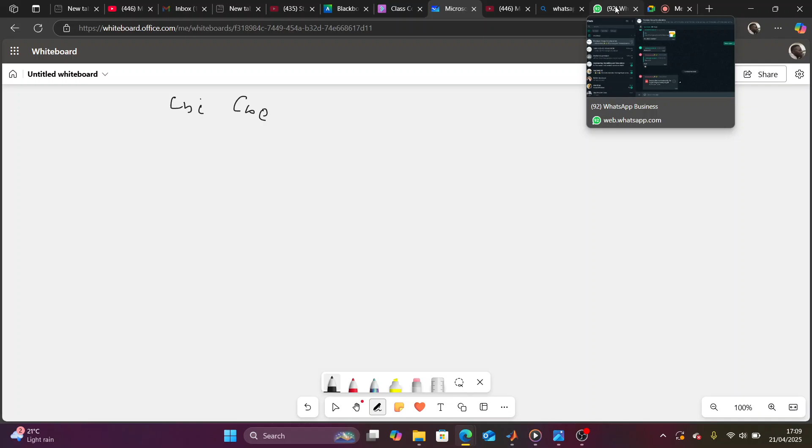So, oh, Daphne, Masimeme, Bukalo. Hello, Bukalo. Hi. I didn't see you today. What happened? I was cold, not feeling good. Oh. Yeah. Tomorrow is gonna be cold then. Hi.

Even though I cry, it doesn't mean that I'm weakening. Where is it? This is chapter 5, ne? Chapter 6. Why is this thing not rolling? My heart is beating. I just wanna love you, I do. Hey, I love singing, you see. That's all I do when I sit alone. I sing. I just sing for a living.

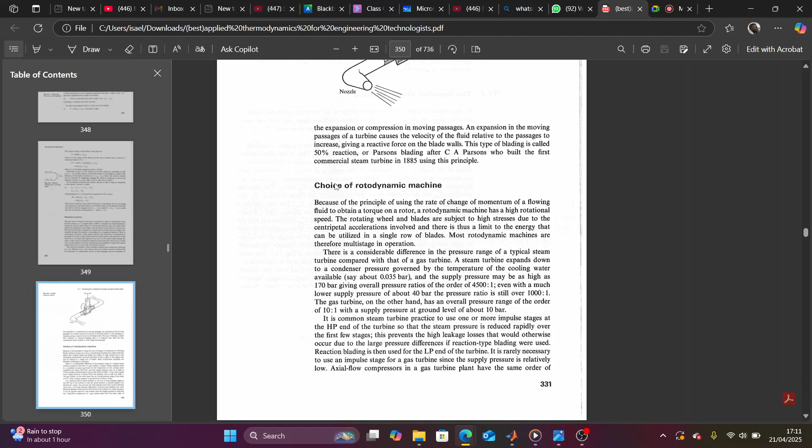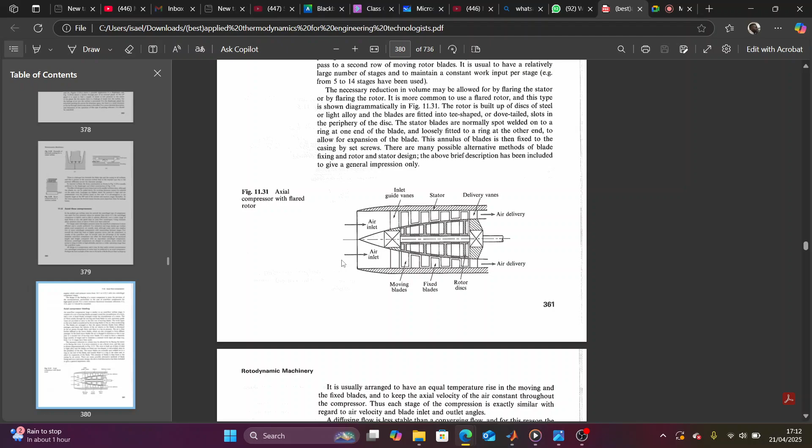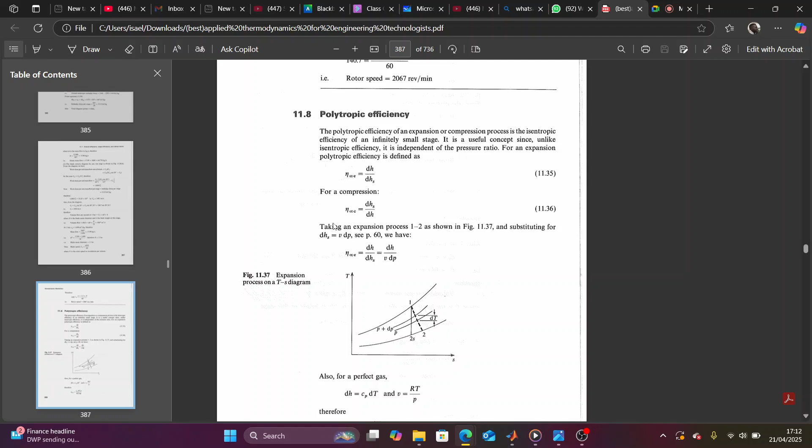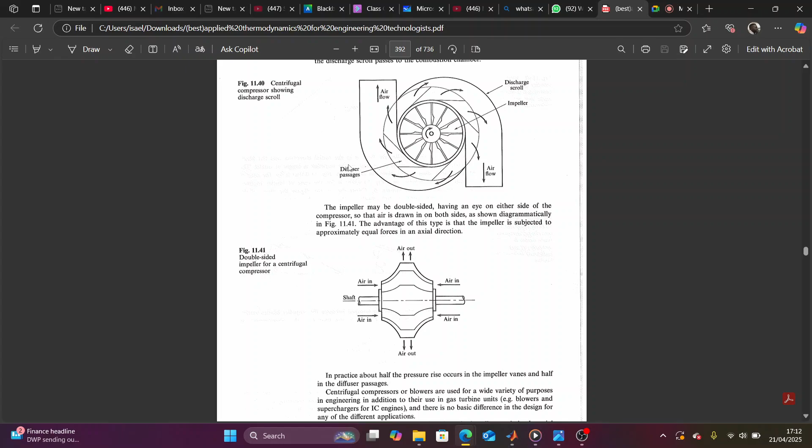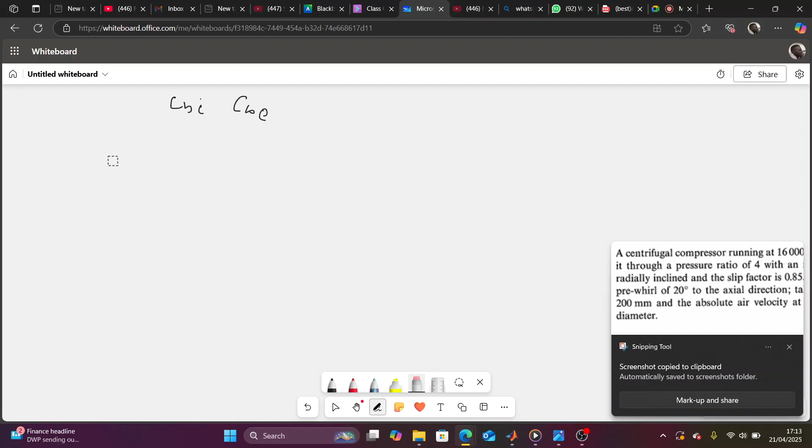I don't wanna say much. Key 11.20. Let me print it. I just wanna love you, I do. I just wanna kiss you, I do. Hello, Bukalo.

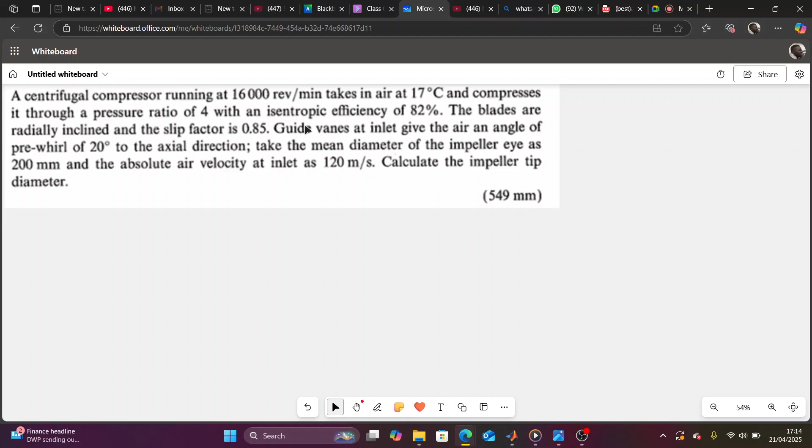Guys, I'm gonna miss you because you guys gonna be the last generation that higher education has taught. Last, imagine. You're not teaching next semester? I am. You guys gonna be the last generation because this is my last one, my last year, my everything.

I'm giving my all. Okay, guys, they said a centrifugal compressor running at speed takes air at 17 degrees and compresses it through the pressure ratio. This is the pressure ratio, RP, of efficiency 82. They say the blades are inclined and the slip factor is 0.85. Guide vanes at inlet give an air angle pre-whirl of 20. Okay, this one is pre-whirl. That's why we talk about W. When you hear about pre-whirl, that's why you talk about WR.

You will see, to the axial direction, take the mean diameter of the impeller eye to be this. Calculate the tip diameter at inlet. Okay, remember guys, you have two diameters here. You have the mean diameter of the impeller eye. This diameter is the one that we use to solve the speed that the compressor enters. The impeller tip diameter is also something.

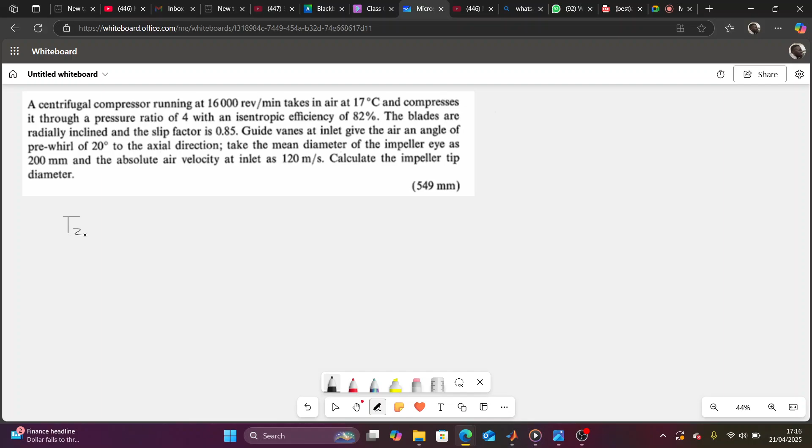T2S minus T1, where T1 is the temperature at the entrance, which is this one, 17, to be equal to T2 minus T1. That is what gives you the efficiency η, this one.

You also have this relation here that says T2S over T1 is equal to, normally we write P2 over P1. But P2 over P1 is what makes the pressure ratio RP. So that's one of the reasons we write it like this. We write it as RP, everything to the power gamma minus 1 over gamma. Remember, gamma is a property of air, which is 1.4.

So when you have this information, do you know why we are given this information, guys? The only reason you are given this information is to solve for the power. You have two ways of solving the power. The first way, according to the centrifugal compressor, you have this formula. Let me show you. Where's the book again? Here is the formula of the power input.

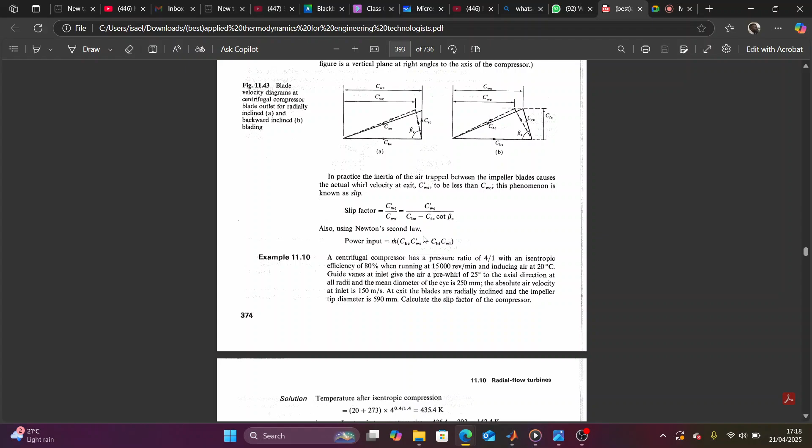Do you guys see it? Okay, you have the formula of the power input. Let me write it. What is the formula of the power? Let me copy from my textbook. Power, they say, is flow rate. If there's no flow rate, you don't write it. But there's flow rate. The only reason there's flow rate, if you remember in class, I said everything that is flowing. Remember, on this centrifugal machine here, there is a fluid flowing. That's the reason why you see its presence.

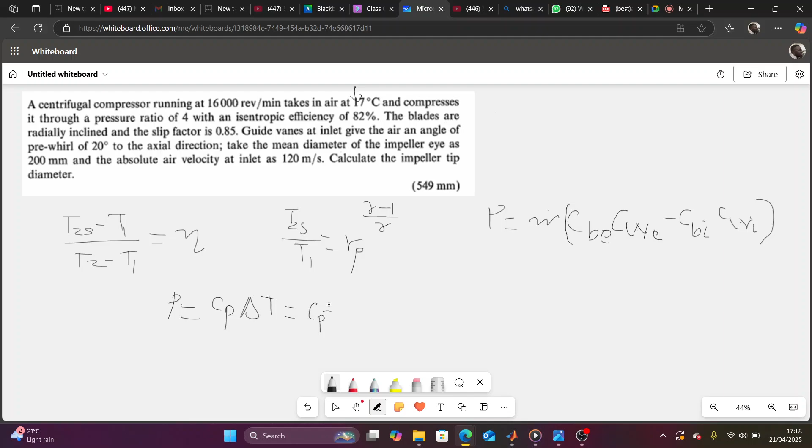Okay, my good guys, this is the power. You can also get power with these temperatures. What is power? Power is Cp multiplied by change of temperature. But in this case, what is the change of temperature? It is T2 minus T1.

So, this type of question, I want you guys to see it like this. Sometimes they can ask you to solve for the slip factor. This information of temperatures given to you, this temperature here, and the efficiency here, is given to us to solve for the power. So you already have extra information. You see it now. That's the reason when you solve this power here, you can equate it here.

Okay, let's start solving the problem. Let's solve the power. We don't have this one, we don't have this one, we don't have this one, but we can get the power here. Do we agree, guys? Okay. Why are you saying great? Okay.

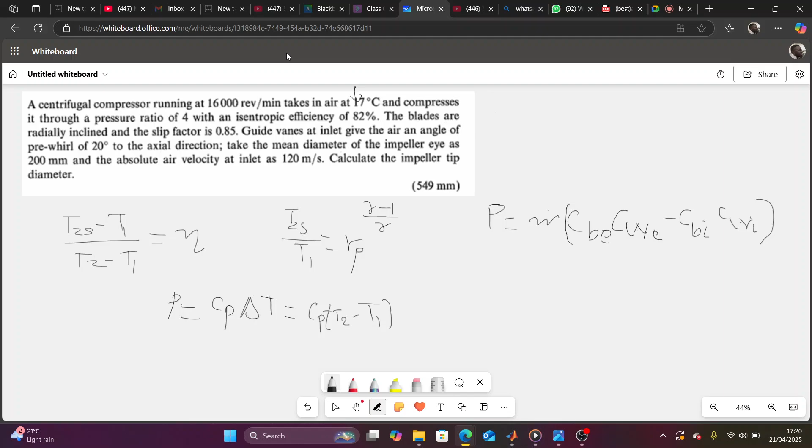What do we need to do quickly here if we have to solve for the power? We need T2 minus T1, right? We have T1, the temperature of air here, 17. We have the efficiency. Now, what can we do here, guys? We can do a quick math. Do you agree that if I can get T2S, I can solve for T2 minus T1?

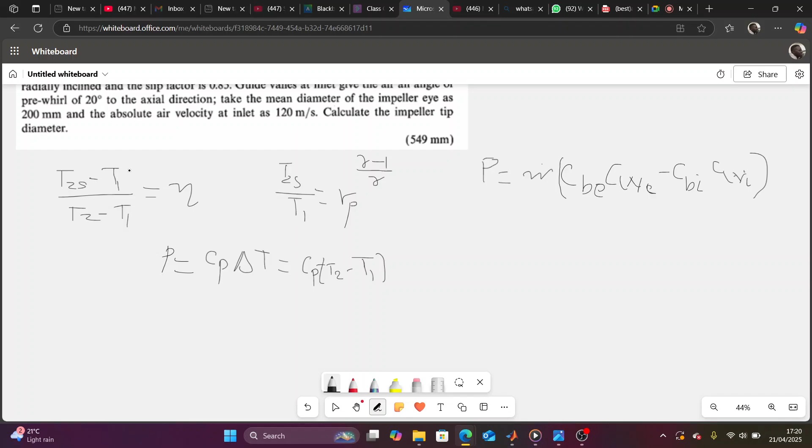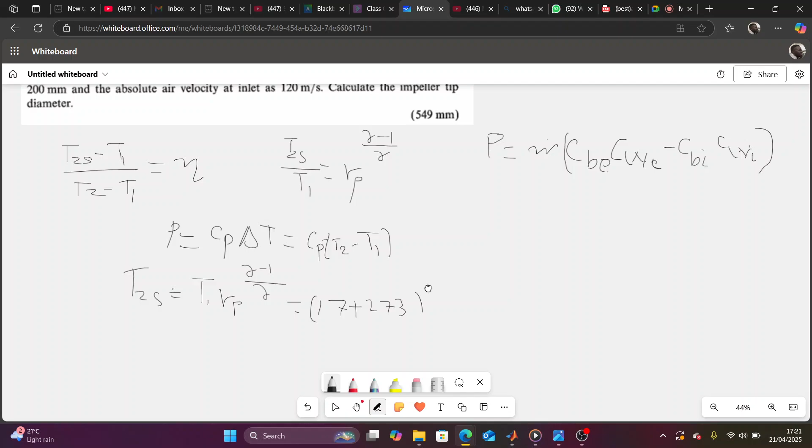Let's start here. If we have to get T2S, what is T2S? T2S is T1 multiplied by RP to the power gamma minus 1 over gamma. Can we do the calculation? T1 is 17, and it has to be in Kelvin. Are we all good? Multiplied by RP, the pressure ratio, which is given here as 4. On top is gamma minus 1: 1.4 minus 1 over 1.4. If you do this calculation, you get T2S.

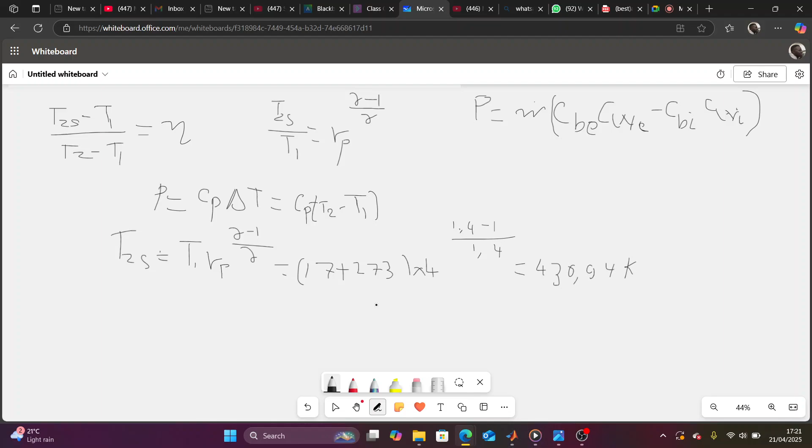What is the answer? Hey, you joined earlier. Are you with me? It's 430.94 Kelvin. Okay, do you guys agree that if I have T2S, I can now solve for this one here? I can use this formula and make T2 minus T1 the subject of the formula. I don't have to solve for T2, I don't know if you notice.

Do you see? I don't have to solve for T2. I can simply make T2 minus T1 subject of the formula. What's going to happen? I'll have T2S minus T1 over what? Over eta. So therefore, you have T2 minus T1 to be equal to what? What is T2S? It's what we just solved.

430.94 minus what is T1? 70 plus 273 is how much? 70 plus 273 to get this in Kelvin. It is 290, eh? It's 343. Is it 343? 17 plus 273. Oh, you're saying 7. I thought you were saying 70. No, forgive my English.

What is eta? Eta is 82%. So if you convert it, you have 0.82.

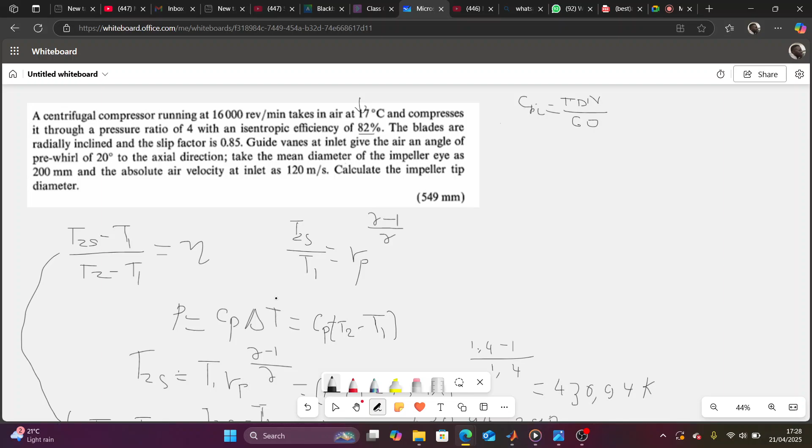What are we given? We are given the speed in rev per minute of the centrifugal compressor, which will give us CBI, pi d n over 60. We are given efficiency. The efficiency is used to solve the power. Remember, the pressure ratio and efficiency they gave you are simply for you to get the power using temperatures.

So I don't know if I should also write it. Just write it. We are given the efficiency. Let me write the formula that will be used. It will be used to find T2S minus T1 over T2 minus T1, everything equal to efficiency. Are we good on this one?

You also have another piece of information that we'll be using here. This pressure ratio of 4, is it like T1 over T2? No. Normally the formula is written like this: T2S over T1 equal to P2 over P1. This is the pressure ratio, which they already gave you. That's RP. Check chapter 10. So the 4 is P2 over P1? Yes, that 4 is called RP, pressure ratio.

Whenever you hear pressure ratio, like even on the example here, what was the pressure ratio? They said pressure ratio is 4 over 1, which is simply just 4.

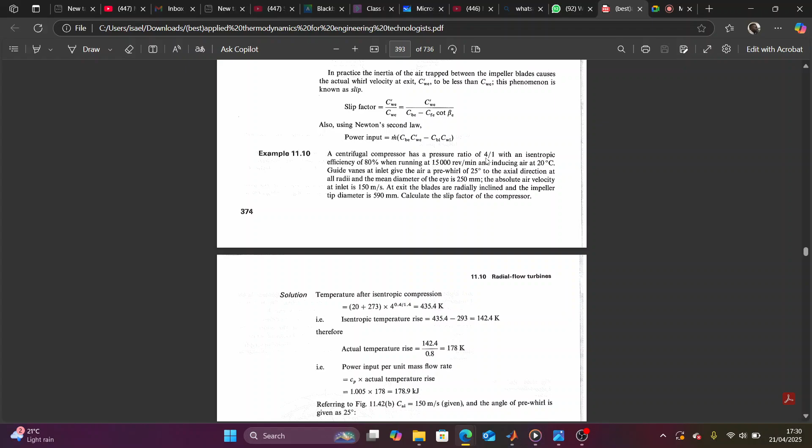So yeah, let me just recall it. RP gamma minus 1 over gamma. Now let's read again. They say the blades are radially inclined and the slip factor is, I don't know how you guys call slip factor, but in our case here, let me just call it S. They said guide vanes, they are saying guide vanes at inlet air angle.

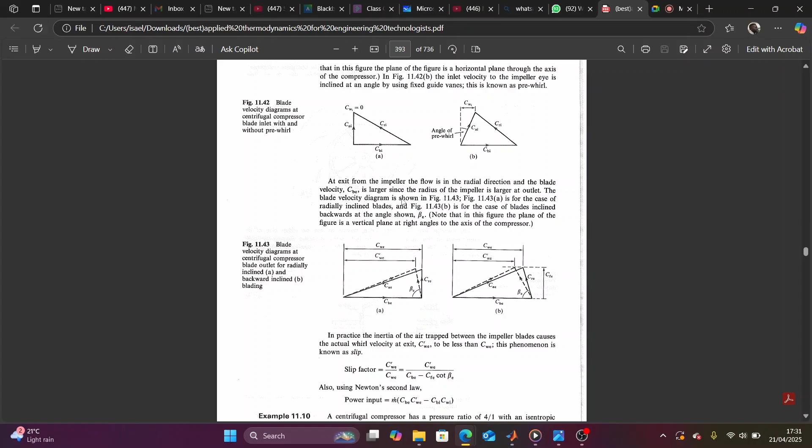Remember, if you look at the drawing here on the explanation, these things come at an angle. There is a triangle, so there is an angle there. Let's call this angle theta to be 20 degrees. Now they say take the mean diameter of the impeller eye. The impeller eye is simply the one at the entrance, and it is 200. So what is that diameter? It is the diameter here. That D is 200 millimeters.

Now what is happening? We have the absolute velocity at inlet. What is the absolute velocity at inlet, guys? It is simply CAI. It is this velocity. So whenever you hear inlet, it is CAI. What is CAI? CAI is 120 meters per second.

Now, what is the question? Calculate the diameter of the impeller tip. You have to make the difference. That diameter comes from the formula of CBE. CBE is also pi multiplied by d multiplied by N over 60. But in this case, what is our d? We do not have it, which is what we are looking for. So I'm gonna repeat myself. For CBI, the diameter that you use is the impeller eye. If you hear the impeller tip diameter, it is the diameter for CBE.

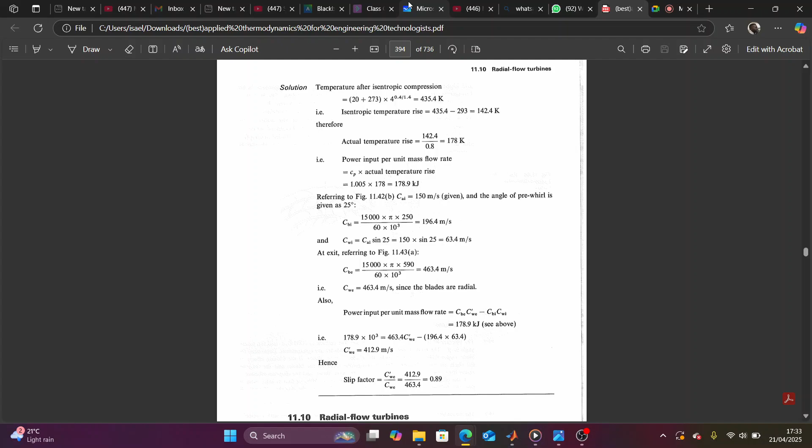Let me show you again in another example in the textbook. In this example they said the tip diameter. What is the tip diameter? It goes with CBE. That's why you see they use that 590 here. So you can recall it like that. Any question, guys? Okay, we move.

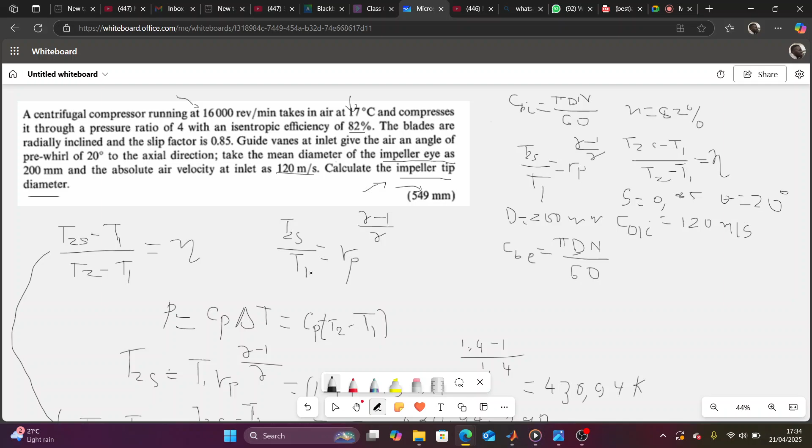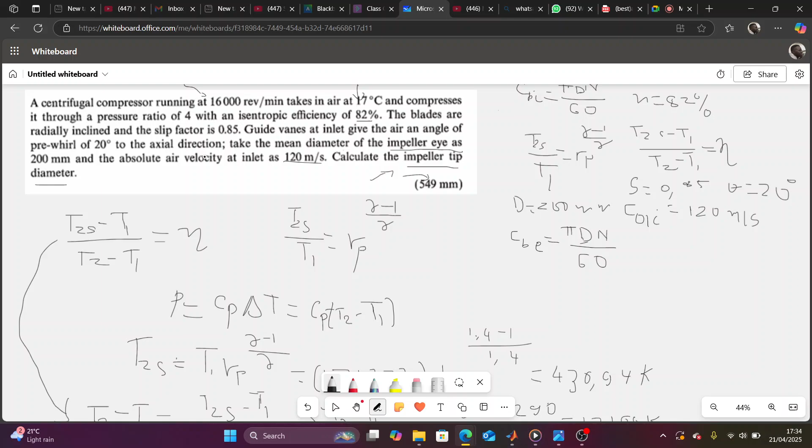Whenever you are solving this problem on the compressor, no matter if you don't know what is being asked, the first thing to do is solve for the power. Remember, power is also equal to M multiplied by, from the textbook, CBE multiplied by CWE, minus CBI multiplied by CWI. We have already solved for the power. The next thing to do is simply to solve for all the elements inside here. You have the power which is here.

Now, you also have another formula from the textbook. It says slip factor is equal to C prime WE over CWE. Now we've got everything. Yes? Can you please just repeat from the power? This formula, I just copied it from the textbook. Do you see this one?

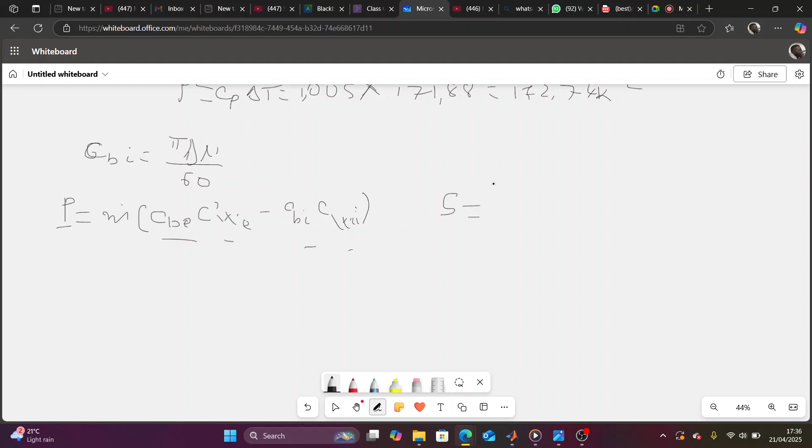You also know that S, the slip factor, is C prime WE over CWE. Okay, guys, can we proceed now? Let's start by getting CBI and CWI. This one we can get easily. For CBI, we've got everything, we just need to apply the formula. Let's get CBI. That's wrong handwriting. I need to buy a pen and a digital tablet for my online classes.

Pi is pi. What is D? D is the diameter given here, the impeller eye, 250. We're using it in meters. In meters it is 0.25. What is N here? 15,000. Over 60. If you do this, you're gonna get CBI. What is the answer?

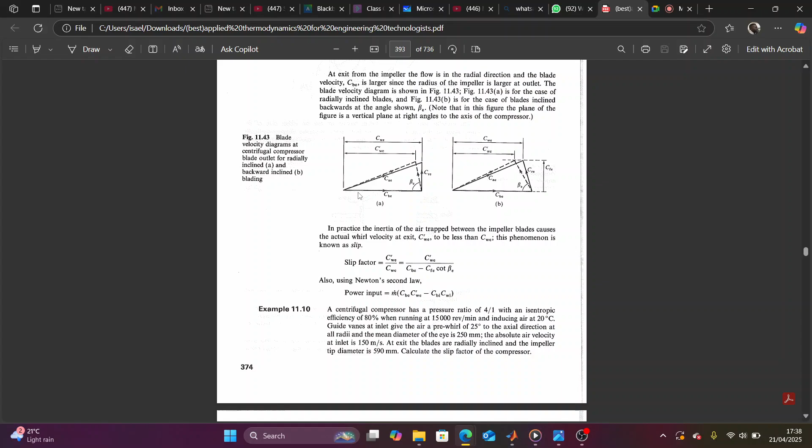How do they get it again? If you look on the example on the note, do you see what is CAI? It is just on the opposite side. Do you see CAI here? When you look at it as a right angle triangle, CW here. Here it is 0, but it changes depending on the angle of the pre-whirl.

If the pre-whirl is 20 or whatever, this thing keeps moving. So how do you get CAI? Remember, do you see where there is CWI? Look at the right angle triangle. It is on the opposite side. It was the simple reason that CWI is this sine theta, sine this angle here.

Let me do this so that we can all be on the same page. Angle of the pre-whirl.

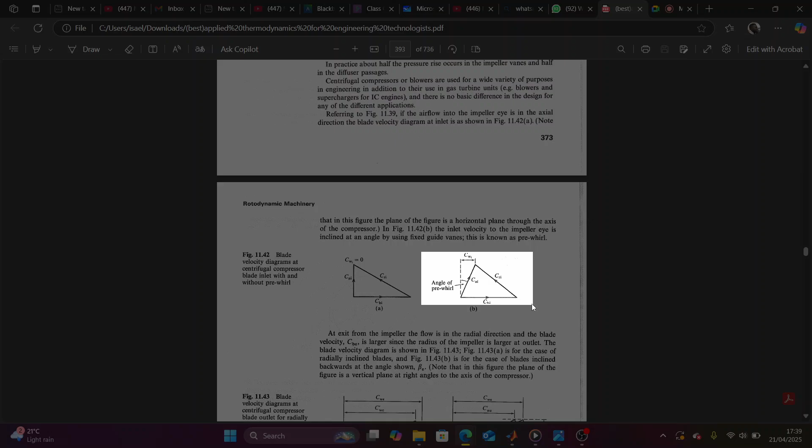Who's joining at this time? You always coming late. Even online you are late. Mr. Gordon, even online you are late, my brother.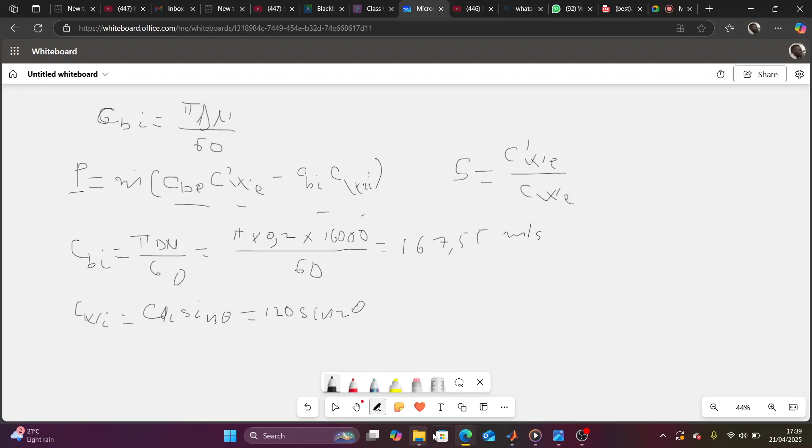Okay, do you see what I'm talking about? This thing is changing according to the angle of the pre-whirl. Do you guys agree? The angle of the pre-wheel in this our case, it is this angle, it is 20. Do you see what I'm doing, guys? So this is 20, but this one here, it creates a right angle triangle. So what is CW? CW here is on the opposite. That's why you see CWI is simply CAI sine of the angle of the pre-whirl, which is called theta.

All you have to do for CWI, you can simply remember this. As long as you hear that there's a pre-whirl angle, you know that CWI is this sine this. But this is how it is proven.

Are you with me, my guys? You see only one speaking, how about the other one? Are you with me? Yes. Can I delete this picture? Let me leave it there.

So if you calculate this, what is CWI? It is 41.04. Is it also raining there by you?

No. Yes. No. Okay, then we are not in December. We are not in December.

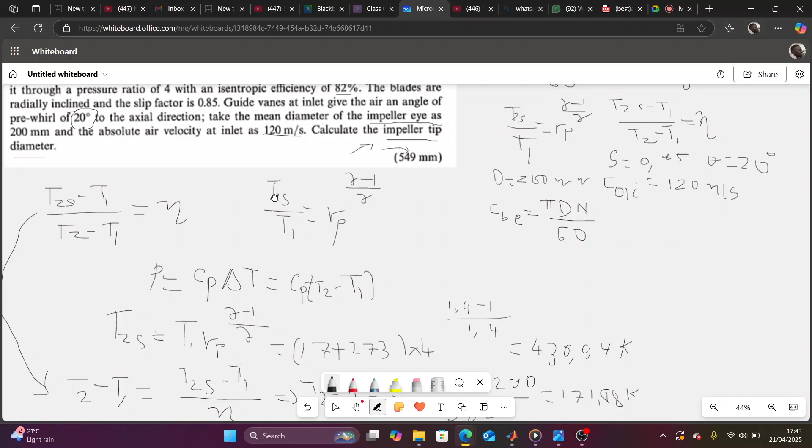Now how do we get this guy CWE now? Remember, because this thing is radially, let's read the problem. Is it radially inclined? They say the blades are radially inclined. The term radially here is simply being explained in the textbook, like if you do have radially blade or radially inclined, it simply means the value of your CWE will be the same as the one of your CBE.

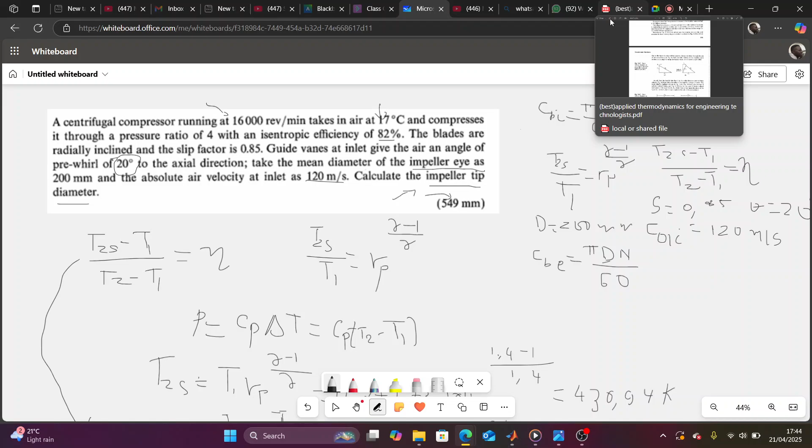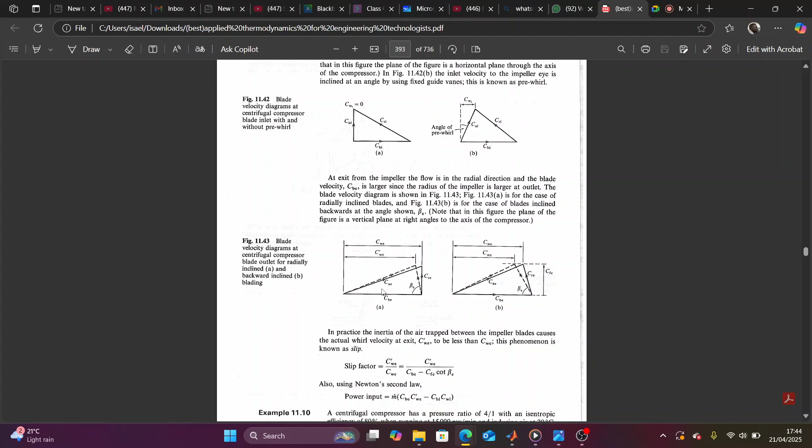When do you have a radially inclined? Let me show you an example. Do you look at this drawing A? Look at where my this thing is showing. On A, in this case, I don't know if I can zoom in. Do you see CWE? When it is radially inclined, you have CWE to be equal to CBE. That's what it means. The figure can change depending on what's happening here, but that is what it means.

So that's one of the reasons, even on the example here, they do consider CBE to be equal simply to CWE because our system is being radially inclined. So what does it mean in our case? What are we going to do here? The same value of this guy here will be the same also for this guy. Any question, guys?

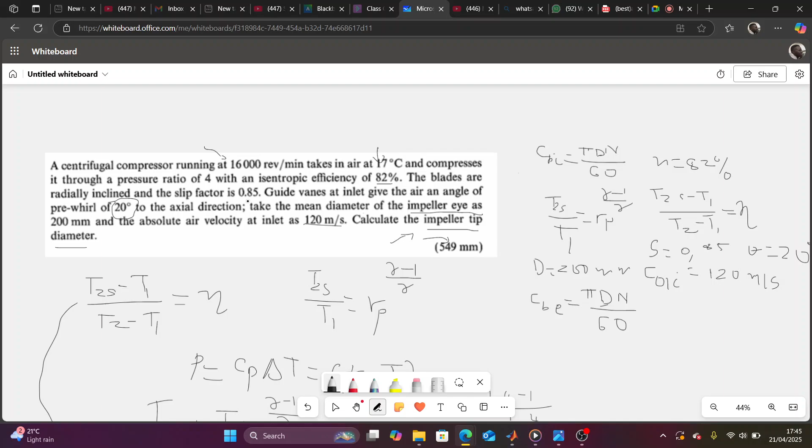Any question? I'm gonna repeat again. Mr. Eyes, can you please repeat the CW what? Which CW, my brother? The one you just wrote right now. Oh, I was saying, as long as you hear that in your question here, these things are being radially inclined, or there is a radial being involved here in this expression, it simply means your CWE, your CBE, let me write it here, your CBE will be equal to your CWE.

So because we already solved CBE on top here, the answer that we got will be equal to this one. Do you see it? Yeah. So if there was no radial incline...

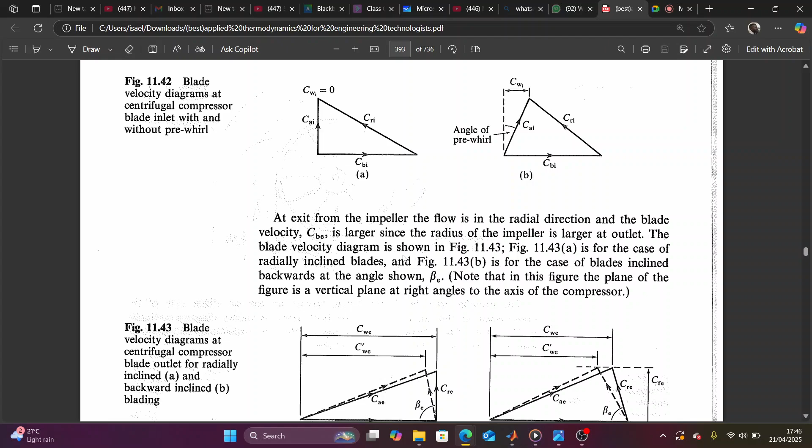Say, how would we find out if there was no radial incline? No, because it's stated. If it was not stated, how would we? Is there a way of finding it? If it is not stated, it means they should give you another information. It's either that information should tell you the angle of beta E, something that can help you get it.

But don't worry, you will not have such a case tomorrow. But if I have to explain it to you, if it is not radial, it means there should be an extra information, either they'll give you this angle. Do you see it, my brother?

Can you hear me, my brother? Yes. Hey, my brother, do you stay with your wife, man? Hey, you guys are living the life. Yes. Did I answer you, my leader? Yes, don't be shy, we heard your wife there, my brother. She's there. Hey, now you are shy. Anyway, nevertheless. Hey, eyes, man. Hey, shy, man. Oh, was it you or was it Esma? It's not me, it's not me. You see, you talk, some people are applying.

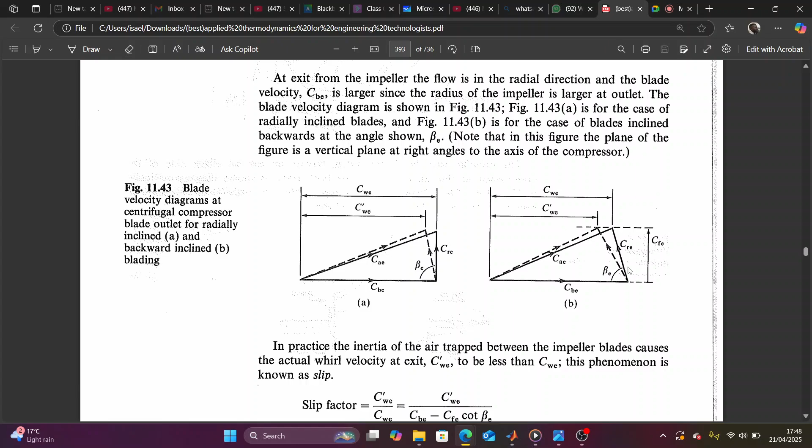Okay, I was saying, if there is no information about radial incline, they should give you either an angle like the one that was here. They said it was 20. They should give you information that can help you get this. But in that case, don't worry, you will not have something like that tomorrow, even on the exam, because I don't want to say if my videos are recorded.

Okay, let's finish this question, guys, we have 10 minutes. Do you guys agree that if we found CWE, we can find C prime WE? Yeah, because S is equal to C prime WE over CWE. So therefore, C prime WE would be equal to S multiplied by CWE. So what is S?

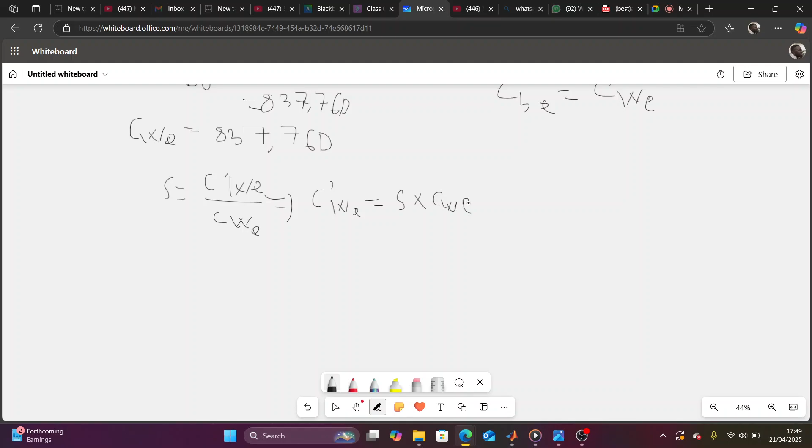S is, how do they call it again? They called S a slip factor, it's 0.85. So we have 0.85 multiplied by 837.76D. Now we can leave it like this.

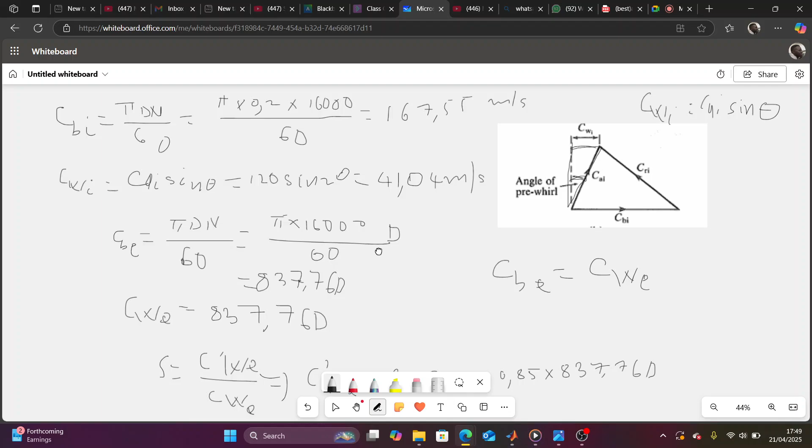Now, my good people, what we are looking for is the diameter. The only relation that can help us get it is the power formula. Let me recall it again. In this formula, do we have any information about the flow rate? So if the flow rate is not mentioned, it means in our formula we don't have to use it, only if it is mentioned.

So what is power? We know that power is CBE times C W prime E minus CBI multiplied by CWI. Now you have everything, my guys. What is your power? Your power is the one that you also got from the temperatures, which is 172.74. What is CBE? You guys found that CBE is 837.76.

What is C prime W? It's gonna be multiplied by, remember there is a D here. This is CBI and C. Yes, CBI, this one is CRI. It is CRI, yeah, your handwriting I don't know. Okay, no, it is CWI. Oh, it's CWI.

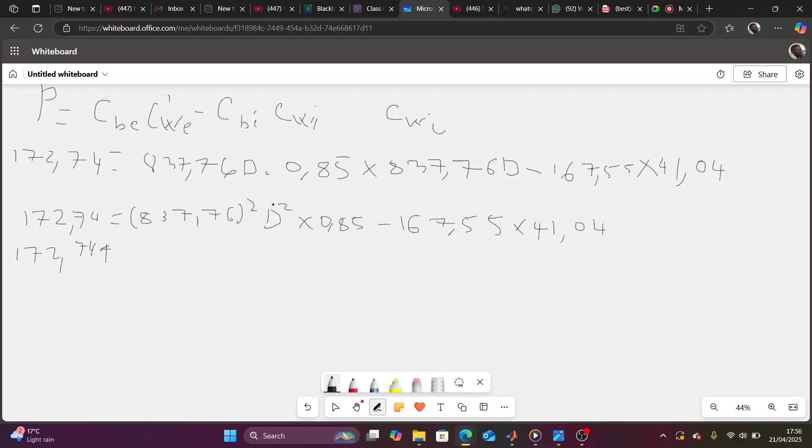So, when did we get the power? Remember, the power, the step is easy. We get that power using the temperature, this step here. Let me see, first of all you have this one. You get T2, you make T2 minus T1, substitute in the formula. You bring it under this one here. You get the power, the same power.

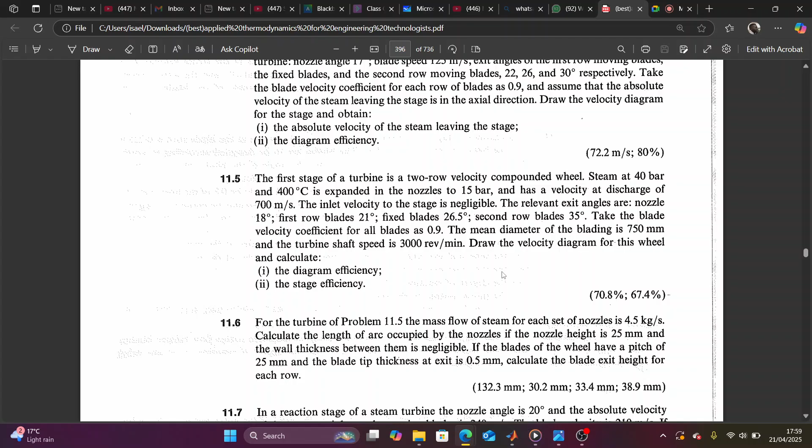Sometimes. What do you get, Bukala? I'm still calculating, I'm getting 0.1087, or maybe I'm making a mistake there. For what? Final answer, final answer is what? 0.1087, or maybe I'm making a mistake. This is not what they are getting. What we're supposed to get, what's the answer? We are supposed to get, Kibukai, that answer, 549, so you're supposed to get something like 0.549.

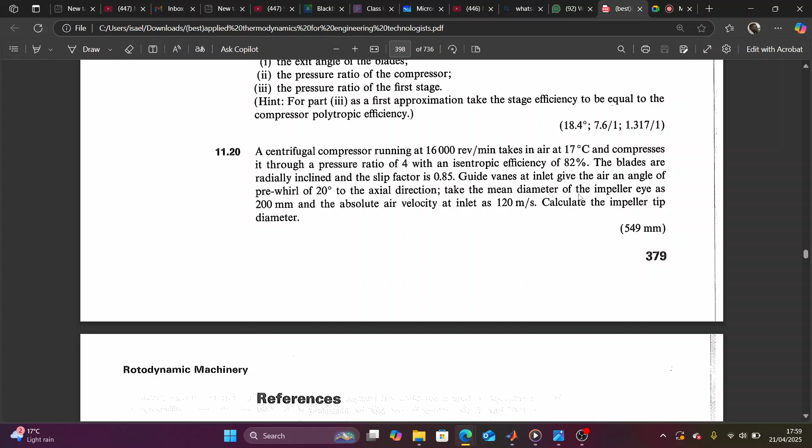Hey, I made a big mess up, my brother. The big mess up is this thing here is kilo. The unit of the power here is kilojoule, so I must times it, you have to multiply by 10 to the 3. Can you try what's the answer now?

Guys, it is already 6 p.m. Let's do the other one because I want to rest, I have another meeting.

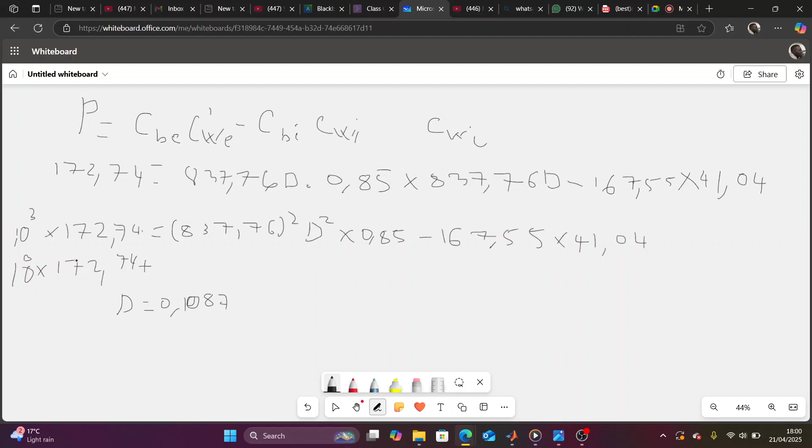Yeah, it gives us 549. Okay, you see the mistake now? The answer here is in kilo. The power here is in kilojoule. Is it kilojoule? Why? Because this thing here, the CPA, is in kilo, that's why it's giving the power to be in kilojoule. So remember to make it 10 to the 3, and you're gonna get that answer. Are we good, my guys?

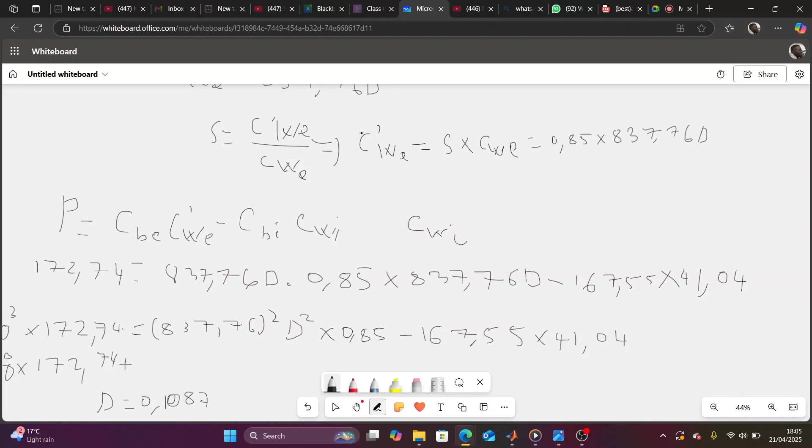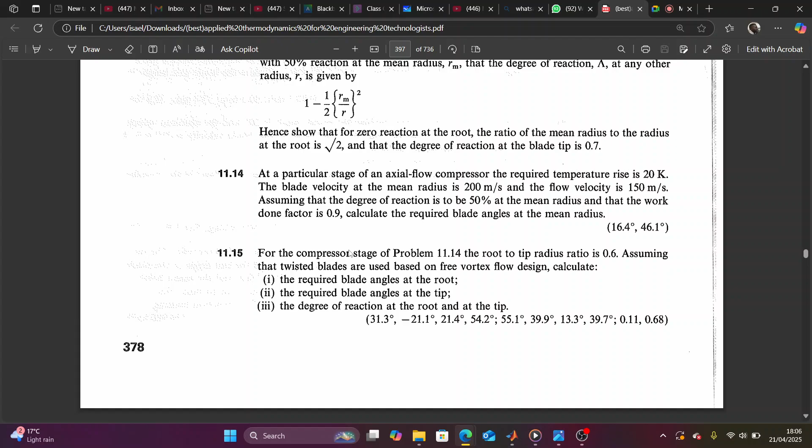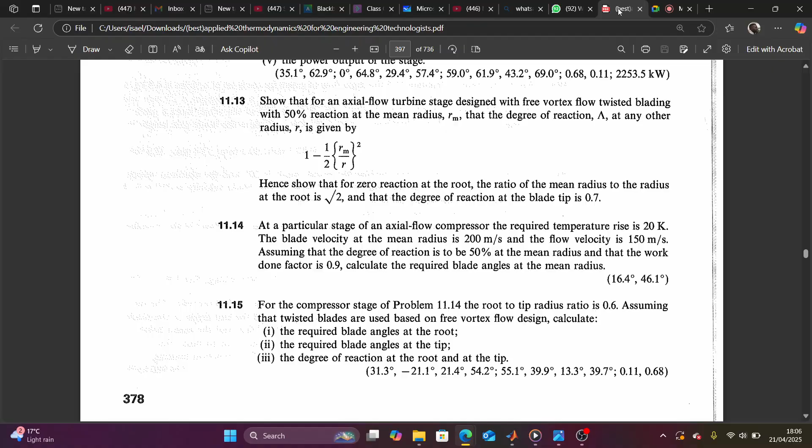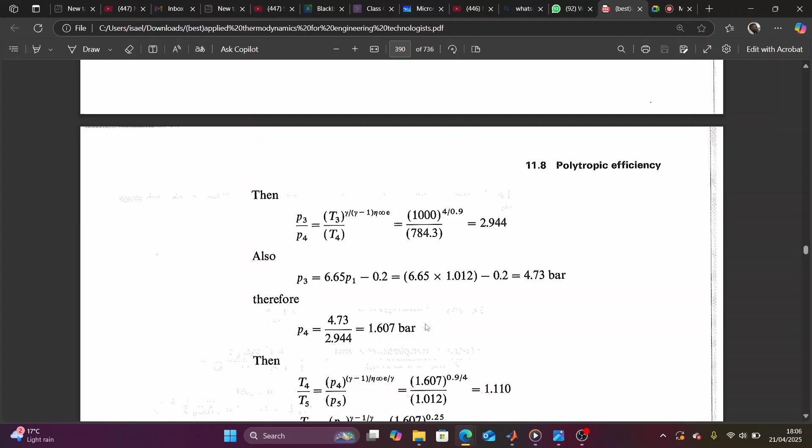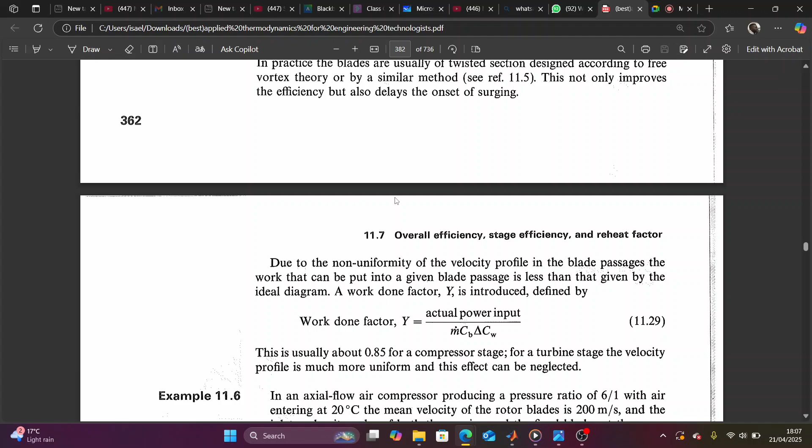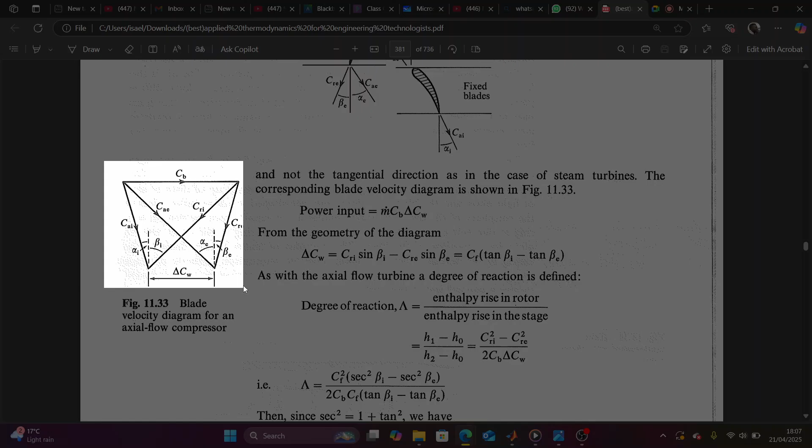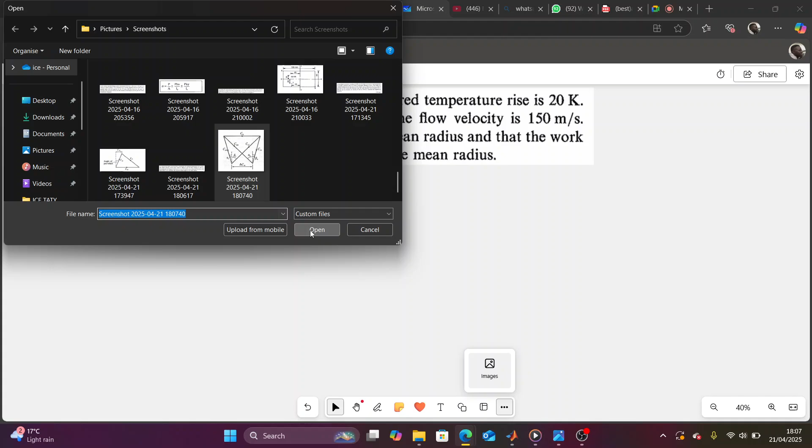Why am I swiping? Let me check my textbook. I have a textbook here. It is axial flow compressor. It is page 361, 360 on mine. Okay, this is the diagram of axial flow compressor. Let me just print it. I was even thinking of drawing it, but let's print it. It is here. Whenever, my good people, you hear axial flow compressor, this is the graph that you refer to.

Now, here we go. They said at a particular stage of the axial flow compressor, the required temperature, this is the temperature T, which is 20 K. The blade mean velocity is the one that they call CB, this one. Velocity of the blade is 200 meters per second.

Who's texting here? Who is texting me? I don't want text, I need cash.

Okay, the flow velocity, this is very important here. I need to explain this. The flow velocity is the one that they call VF. It is equal to 150 meters per second. They say the degree of reaction is 50% at the mean radius. I don't know what they mean by that. But we have a work factor of 0.9. Your book is calling the work factor Y.

Now remember, the diagram that you see here is called a velocity diagram. Normally, to draw this, you need to convert whatever dimension you have in meters per second. You need to create a scale, and then you can plot this. Can you plot 200 meters per second, my brother? You can draw 2 meters, but you cannot draw 200 meters per second. So you have to create a scale. You can say 200 meters per second corresponds maybe to 20 millimeters. So when you come here, you do 20, and everything will be referred to this scale.

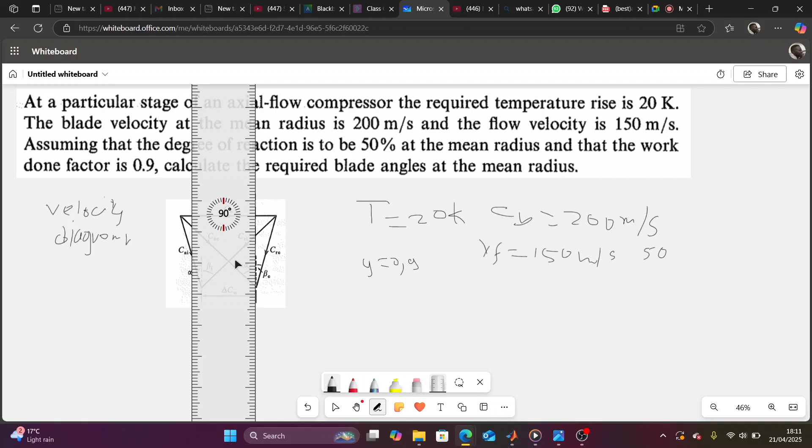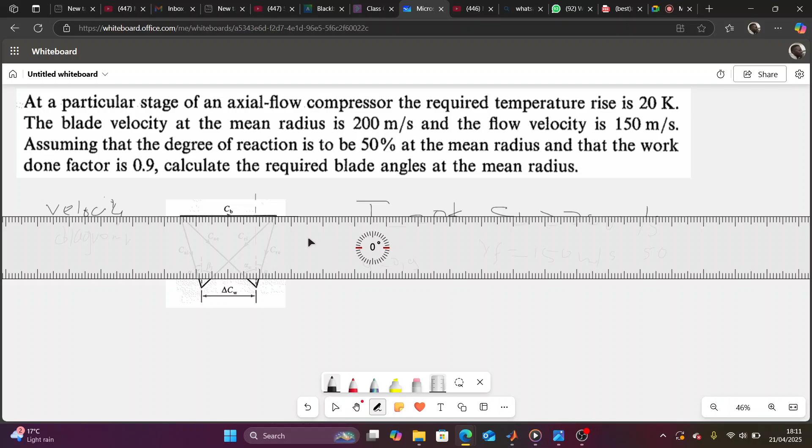In fact, I was not the first guy. I was the second, I think, in mechanical engineering to do online classes. Banana. What is that? It's e-education. E-education is the future. It's the present and the future. We've got the tools here. Okay, what is next? Hey, wait, now move.

Okay, do you see this distance here, guys? It is simply this axis that I draw here. That distance is called VF, velocity of flow. It is the same also here.

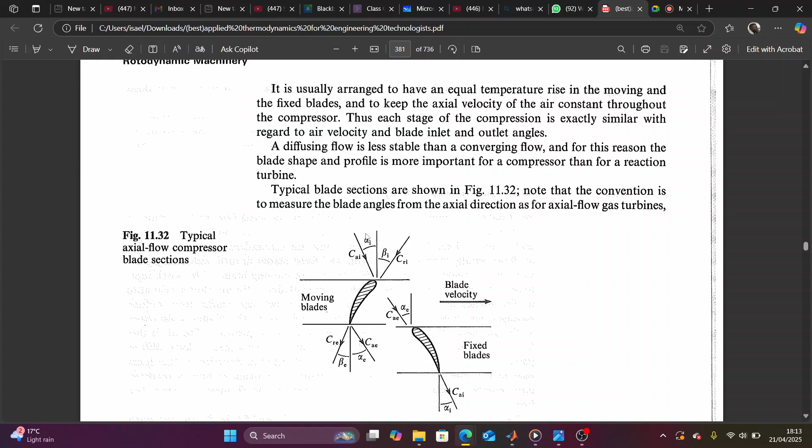The Y stands for what? It is called work done factor. I just wrote Y because this is how your book is calling it. Where is that formula? Your book is saying that work done factor is actual work over this. They call it Y. Do you see where it comes from? I'm just copying that. So it is CB, let me check the formula again. Let me just copy. CB ΔCW.

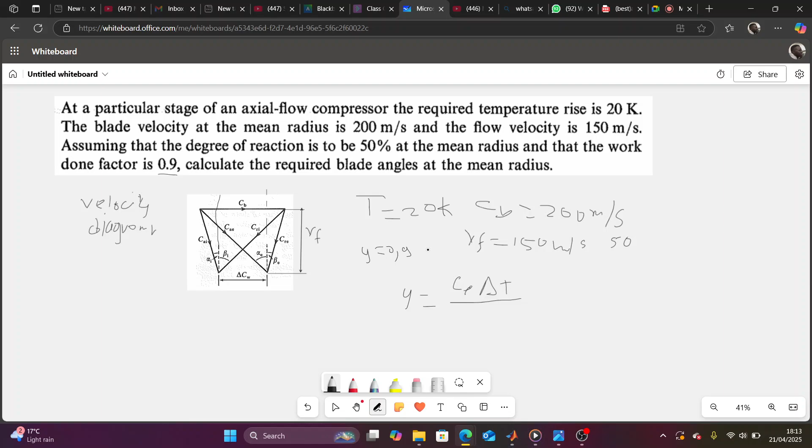Okay, this is what's happening. Now, hey, Mr. Eyes? Yes, my leader. There by 150 meters per second, is it YF or what? VF. Oh, VF, velocity flow. Oh, okay, VF here. Okay, it looks like Y, ne? Yeah, I don't know how to write. Let me write it properly. Yeah, it's very wrong. Nice.

Hey, Felicia, what's that last thing? Well, man, that time of the month. It's that time of the month. Which one? Ish, what are you guys talking about? I don't even know. Hey, my problem is I want to be involved in everything. Some other things don't concern me. I'm supposed to be giving a class and then eat. Ish, my G is cooking. Hey, my boy, I don't remember.

What did you do in the morning? We did strength. Applied. Only. Yeah, and we did chapter 15 on this one, and I promised to do this one online. You finished 15.2. We did. It's similar to 15.1. No, not similar, but you need 15.1 to solve 15.2. Felicia, I will send you the solution. Okay.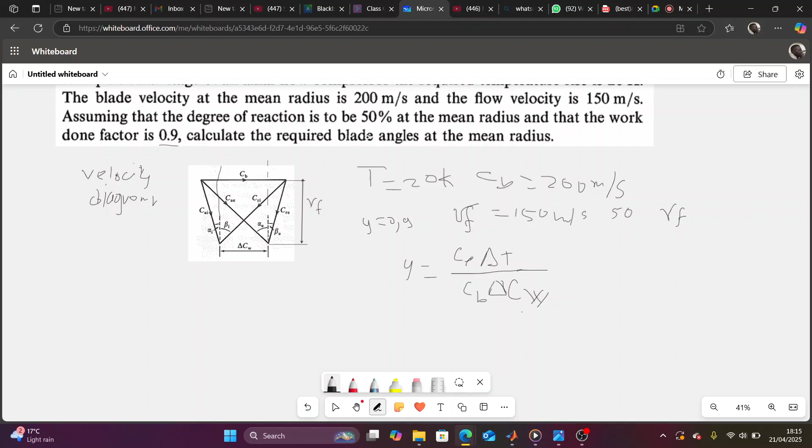Okay, no problem, guys. We have actual work. What do we solve here? What are we even solving? We are looking for the required blade angle at mean radius. Okay, here's another thing that you need to know. When you have an axial compressor, do you see that this angle here and this one are the same? They are the same size, they are symmetric. It simply means if you get alpha I, you get beta E.

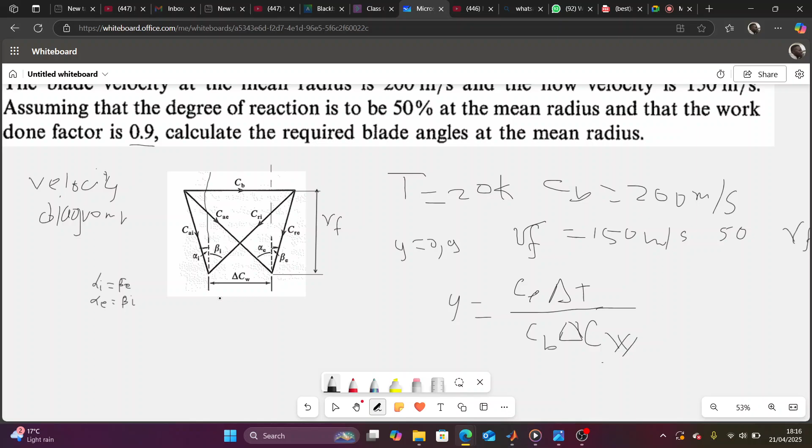If you get not I? No. This is alpha I, this is beta E. Oh, okay. If you get alpha E, you get what? Beta I. Yeah, so the question asked here is simply to calculate the required blade angle. It is to solve for these angles. So how do we solve it, my good people? We are solving for what? BI, ne? No, blade angles. We are solving for all these angles. Oh, for all the four, but remember, if you find one, you find the other one. So you're only solving for two angles.

Do you see it, Felicia? Now, my G, what's happening here is simply some math. Do you agree that if I get DCW, I can get this angle? You can play with geometry. Do you agree, my brother? If you get the C? If I get DCW, if I get this distance, I can solve for this angle. So that's why we are going here on this factor to solve for DCW. That's the only reason.

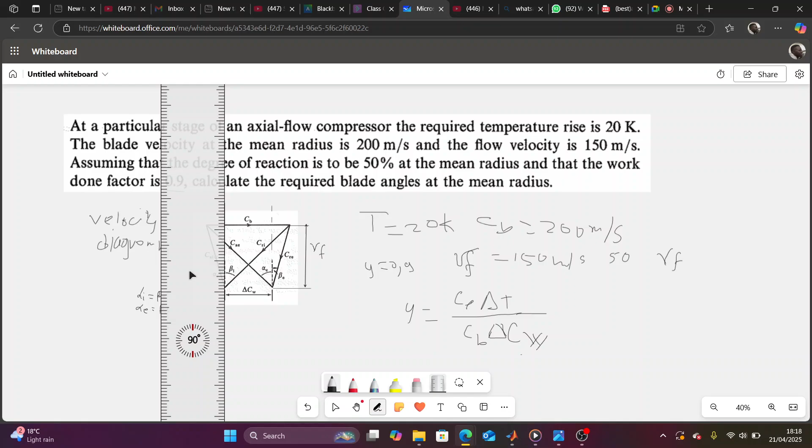Now let me finish this. I want to finish this in the next 20 minutes. My time is precious, like precious. Loving you is a losing game. Okay.

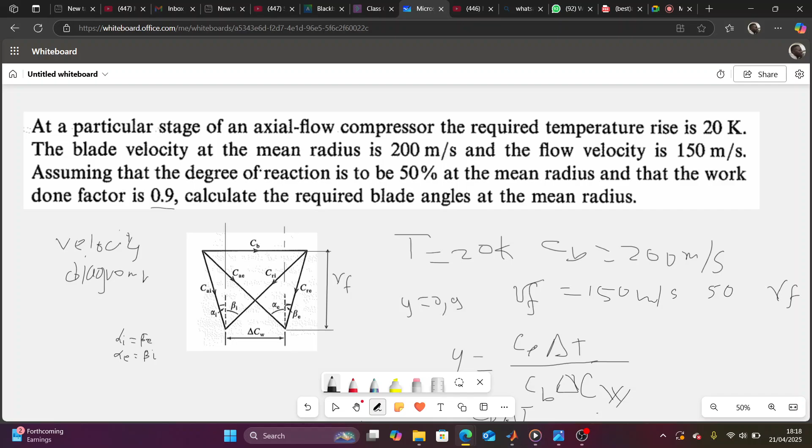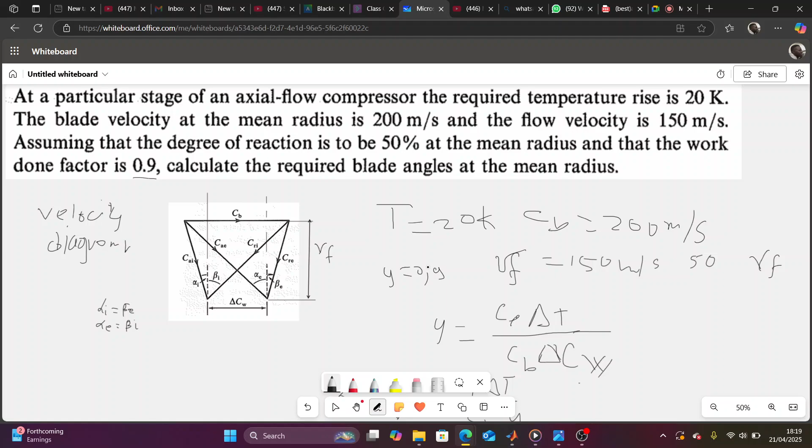So the aim here is to solve for DCW. What is DCW? It's going to be CP times change in temperature, everything divided by CB times Y. Do you see it? So what is CP? Remember, this thing is exposed to air. That's the reason the CP that we use here is the one of air, which is 1,005. What is the temperature here? We don't have a change in temperature, we have a constant temperature, so we can only take 20. And temperature should be in Kelvin. It's already in Kelvin, no need to convert.

So you have to pay attention. It is 20 K. Now, what is next? CB was given from the beginning, 200. And what is Y? Y is the factor, which is 0.9. So what is the answer for DCW? Mr. Ice, the Y is what? It's 0.9. It is called the work done factor. It is what we are calling Y. That's 0.112. There's something I'm not sure about: if we have to convert this CP times 10 to the 3. Yeah, I think so. Did we convert it last time? Is it here?

No, Maji, now I'm asking a serious question. It's not about your girl. Did we convert this, my bro? Mr. Isam? Yes, we converted. Yeah, we have to convert it.

Maji, don't feel offended. I was just making a joke. No, sir, I'm not even a culprit, so don't worry. I thought you took it maybe personal. Now, what is the answer? But it's not wrong, Maji. You're at varsity, you must enjoy. That's part of the enjoyment. That's what parents don't tell you. The only thing they tell you is go to school and study. They should also say enjoy. That's what I would tell my son.

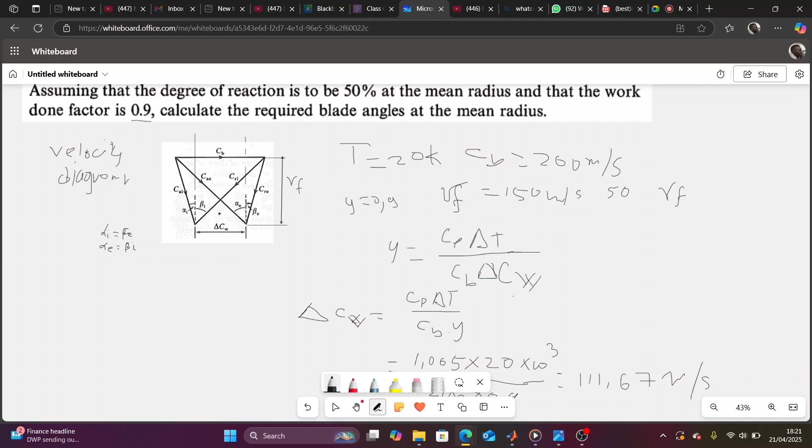Times 10 to the power 3. Answer, so 10 to the 3. It's 111.67. 111.67. Ooh, Daphne, I missed you. Okay, guys, let's see what's happening. If we have DCW, do you guys agree? Now, can we solve for alpha I, guys? Look at this. What is this one?

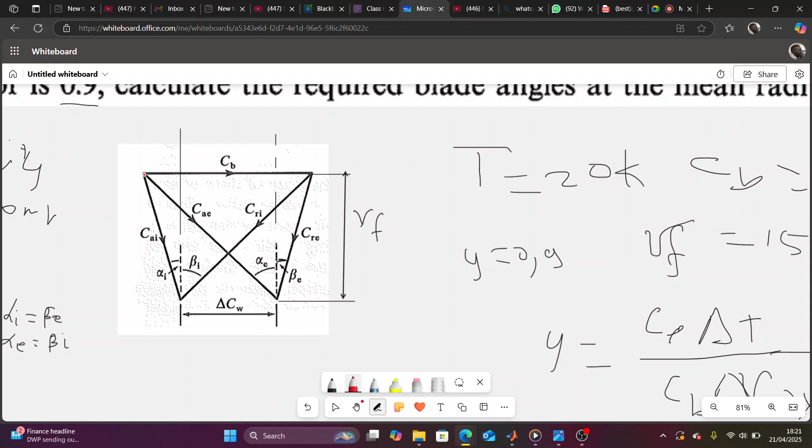I don't want to mess up, but let me just do it like this. What are the units? It's meters per second. Remember, this thing is a velocity diagram. Everything here is in velocity. Do you see it? Yeah. Let me rewind. Okay, look what is happening. If you look at this right angle triangle, let me try to be accurate. Okay, do you see that right angle triangle that I just showed there? This one.

Can we get alpha I, guys? This should be quick. It's a right angle triangle. Can we get alpha I? We've got DCW; DCW is the distance from here to here. Or if you want, can we start first by solving these distances? How do we solve it? Remember, everything here is CB. Do you guys agree? The length from here to here is CB. It is 200 meters per second. 200. Do you see it?

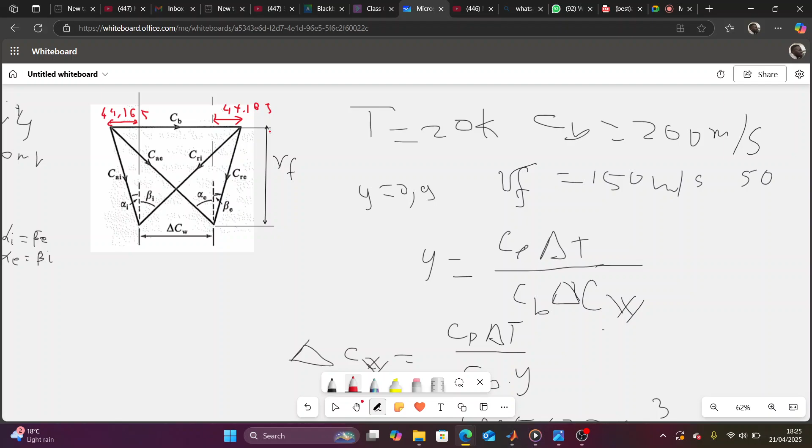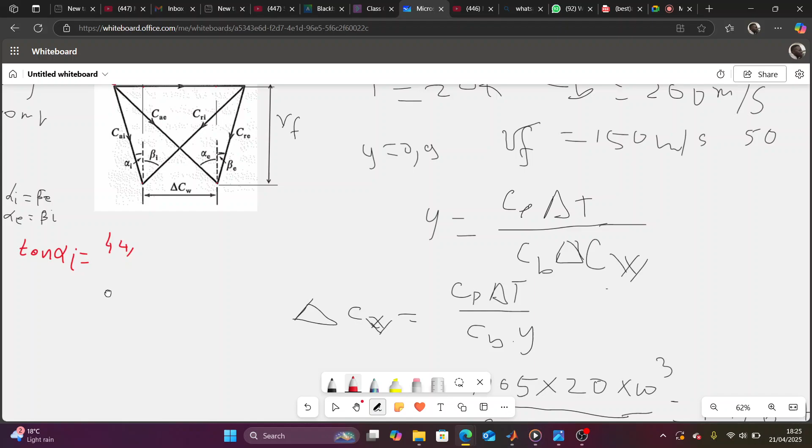Yeah, it gives us 200. Now, what does it mean, guys? Now it's just math. There's no longer thermodynamics here. Remember, what is this distance? VF, right? It is this distance of this and this. Now, if you want to solve for alpha I, what can you use? You have the opposite. You have the adjacent. What formula can you use? You use tan. Tan alpha I: the opposite is 44,165. The adjacent is VF, which is 150.

Now, what is the angle alpha I? Remember alpha I is equal to beta E. So what is that angle? Remember, the angle is tan inverse of this. What is that?

Guys, please, let's try to finish early. I just want to rest a bit.

0.294. Wait, that's not an angle. Now, find the angle. It has to give 16.4 according to the textbook. Yeah, 16.41 degrees. It's just some math, guys. Now, you can do the same for this right triangle. Now we have to think, guys. We have solved for alpha I and beta E. So we need alpha E. How can we solve for alpha E?

Do you also agree that this one is a right angle triangle? You need to be able to see this figure. It is not accurate, but do you see this right angle triangle where the angle is alpha E? Now, what can we do to solve for alpha E? You have this distance here, which is the opposite. You still have VF, which is the adjacent. You can also use tan. Now, what is this distance? It will be 44,165 plus ΔCw. Do you see it?

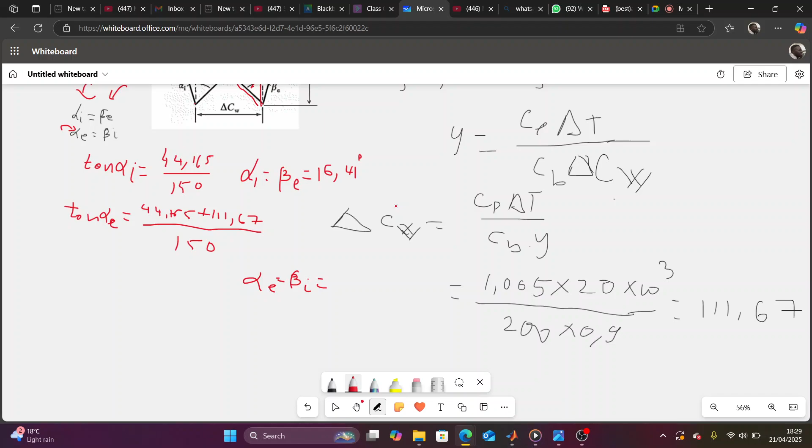Could have made two different videos, but it's fine. How long is this recording? It's an hour and 21 minutes. Not bad. This is the last question. Yes, Madina, I'm listening. Is it the last question? Yeah, bro. Good. Yes, Mr. Aaron, how's it, my brother? No, sorry, bro, I had online classes to cover with my student, that's why I didn't come. But I'll look at it tonight. Tomorrow we're definitely meeting. Je te rappelle.